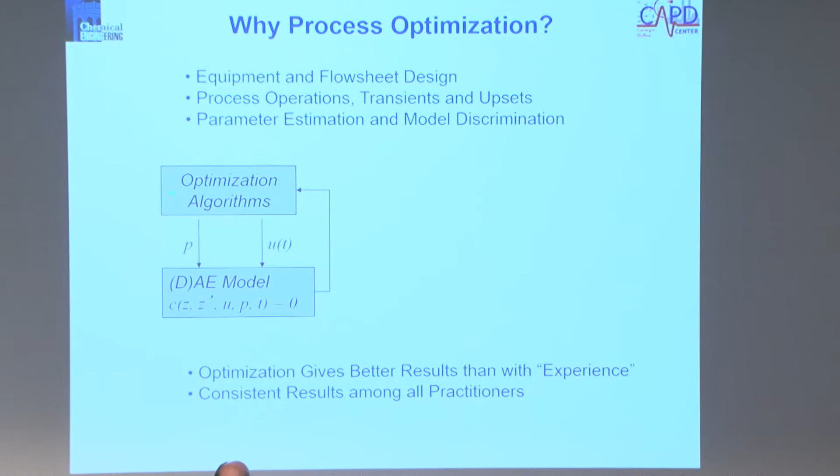So to do this, I'd like to start with a fairly basic concept: what do people think of as optimization? They think of it as glorified case studies. You build a model, and what you do is run a bunch of cases with certain inputs, maybe some trajectories. You solve that model many times, and there's usually some procedure, some guide that helps you come up with that. Then it decides for some reason that it's done, and you decide that's the best you're going to do. That mindset has been around for a long time, in commercial products as well. And it's one of those things where you wonder, can I do better?

A lot of people look at this and say, sure, I can do better. I can just use my brain and get some insight into the process and do it that way. But to be honest, it is something that engineers do, whether they realize it consciously or not.

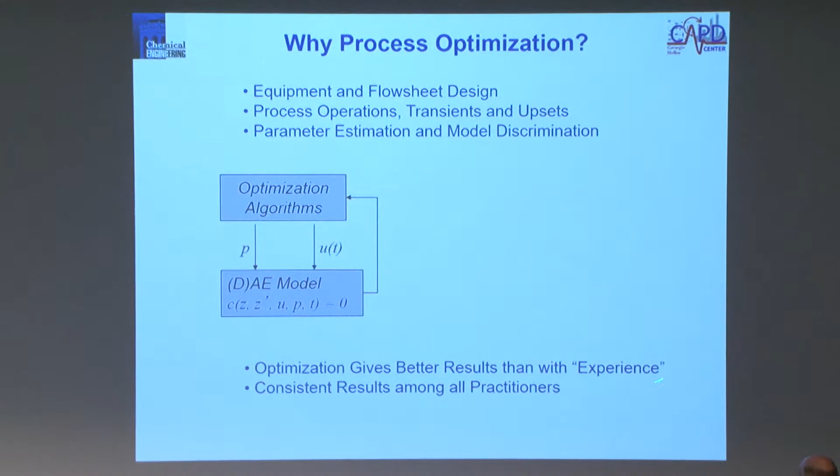What you're talking about here is equipment and flow sheet design, process operations, looking at transients and upsets, planning, scheduling, parameter estimation, model discrimination. This is one of the reasons why it's good to adopt some kind of systematic approach. It's better than just doing the experiential, intuitive thing, and it's consistent among practitioners.

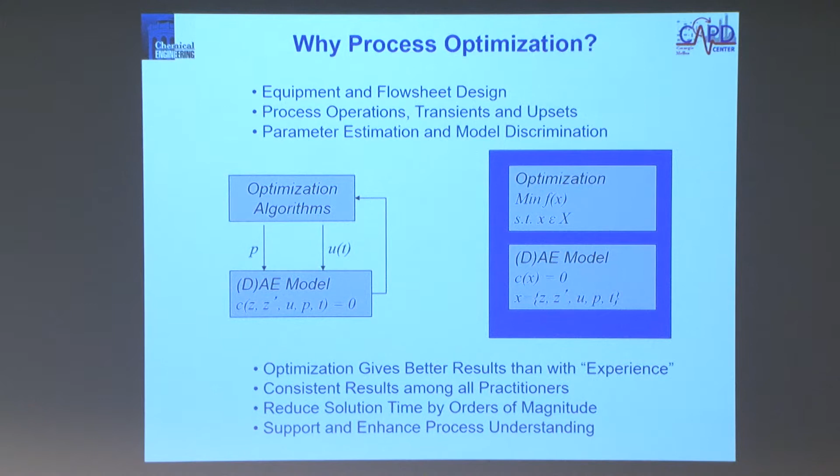But there's something more we can do, and that is to embed that optimization problem inside the solution of the model. We can do these simultaneously. We can find ways to accelerate the process and get more information out of the model, which allows us to say with more certainty what we end up with. So that's basically what has motivated me and several others in terms of thinking about process optimization.

It's actually kind of a nice way of resolving this method of multipliers, looking at a way of coming up with convexifying the Lagrange function, forming things like augmented Lagrangians, and then also being able to decompose them by going further and modifying that. A wonderful paper that was written at that time, work that George did and Art Westerberg did, and the amazing thing with Art is if he's sitting right here, still looks the same.

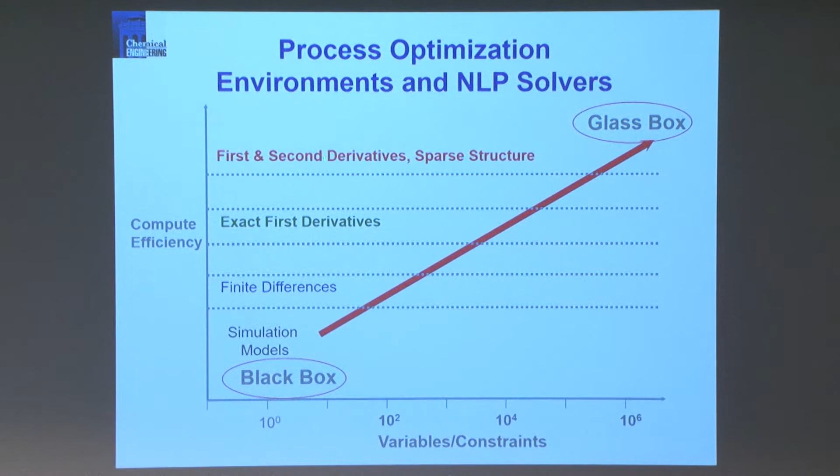There are many modeling platforms, and one I can think of from back early on is the work done at Imperial and at Carnegie Mellon with SpeedUp and with Ascend. What you have then is the opportunity to gradually open up these models and mate them with the appropriate algorithm. Starting down here, you have derivative-free optimization.

Going all the way up, you have the barrier approaches that can handle millions of variables. The number of simulation time equivalents it takes to do a moderate-sized optimization goes anywhere from several hundred, sometimes even several thousand, all the way up to one, where the model and the optimization problem are essentially doing the same amount of work, and then it solves.

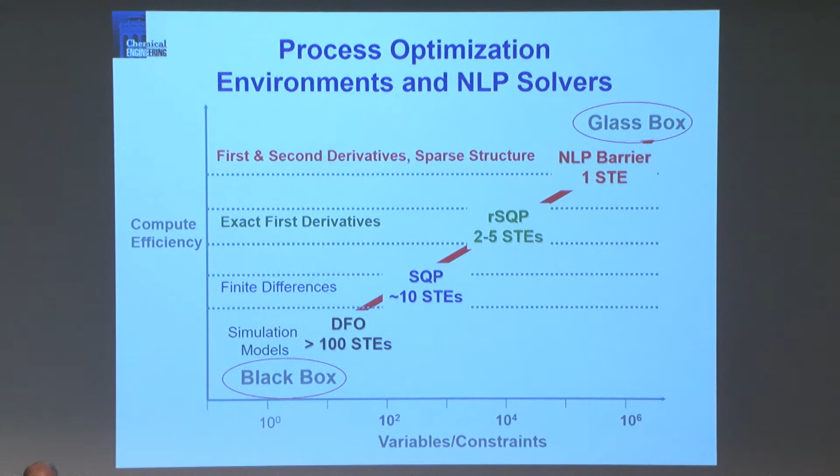So this is the kind of thing that's happened over the last few years. These are the advantages we've discussed. Now where do we go into the future? To go into the future, I'll use this phrase: equation-oriented utopia.

The equation-oriented utopia is coming. It is almost here. And depending on who you talk to, I think you'll say it has been here for a while. So what we're talking about here is glass box models, where you have exact Jacobians, exact Hessians, sparse equation structure.

We're talking about fast Newton-based solvers, the ability to do post-optimality analysis and interpretation, and then you can use that as a springboard to go to mixed integer programming, to deterministic global optimization, and then doing stochastic optimization to deal with uncertainty, and also to deal with non-smoothness — things like MPECs and MPCCs that allow you to deal with complementarity constraints. So those are the kinds of things that are coming, and they're available.

I wanted to share with you what kinds of problems you're able to solve when you do this. Here's a problem we worked on 10 years ago. This was a really neat problem, kind of an important societal problem that we worked on with Sandia National Labs.

This is basically a fault detection system. What it says is if there's a contaminant in a municipal water network, find out where it occurred, how much occurred, how much got into it, and when it occurred. And then what you have is a sensor network — the challenge is also to build that sensor network.

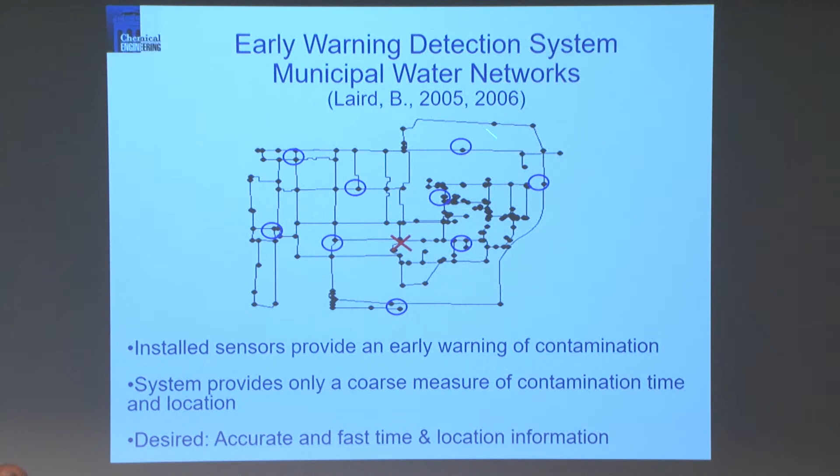But you have that sensor network, which basically says, given that, can I solve that identification problem? So it's kind of a neat problem. There's the fault, there's the sensor network, and you have all these measurements you can take, and now you take that model and solve the inverse problem.

So, good. You make a couple of assumptions. You have pumps, valves, and pipes. You have storage tanks and junctions. And then you think about what you can make as assumptions for the model in terms of mixing at nodes, plug flow in the pipes, etc.

Reasonable things. And here's an interesting one: hydraulics and water quality are decoupled. In other words, if you have a contaminant in there, your pipe flow is independent of that.

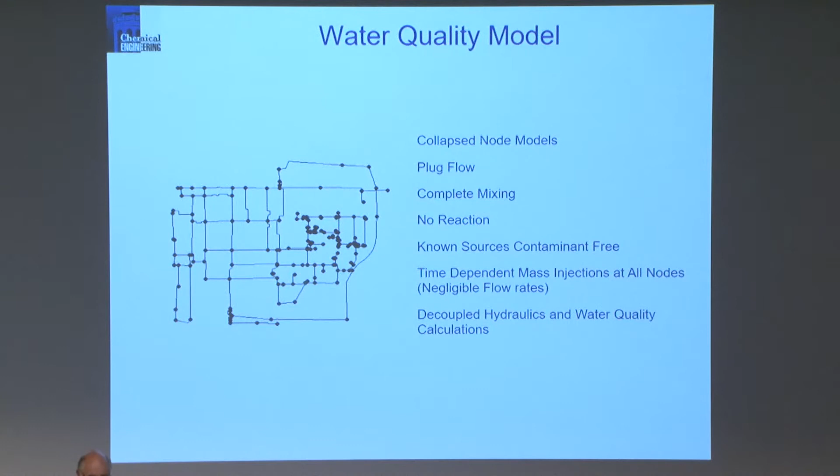Okay, you calculate that first and then figure out how the contaminant moves along. So here's the problem, okay?

So this was kind of an interesting problem that we looked at. Bear in mind, we know the flows, or at least we can get an idea of the flows before we solve this problem. Now let's take a closer look at this.

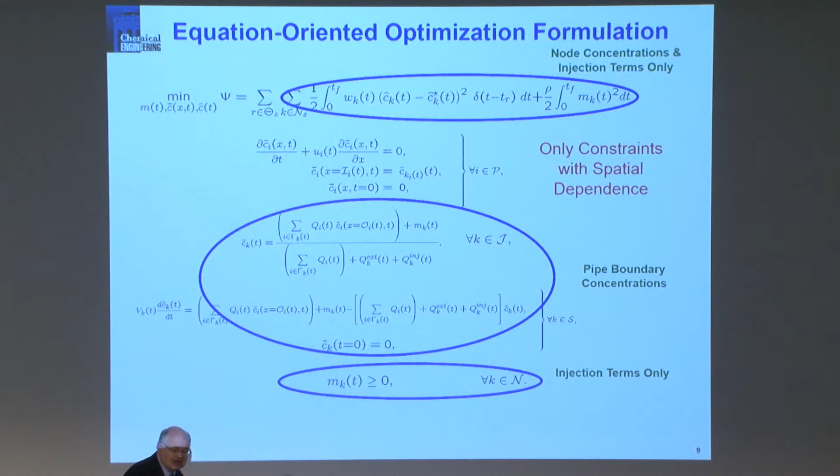How would you like to approach this problem? Do you discretize in space and time, or do you move with the particles? On the left-hand side, you can discretize in space and time. Back when we looked at this problem, we said, for a city where you have maybe 500 or 1,000 or several thousands of nodes, discretizing every pipe segment might get a little bit large.

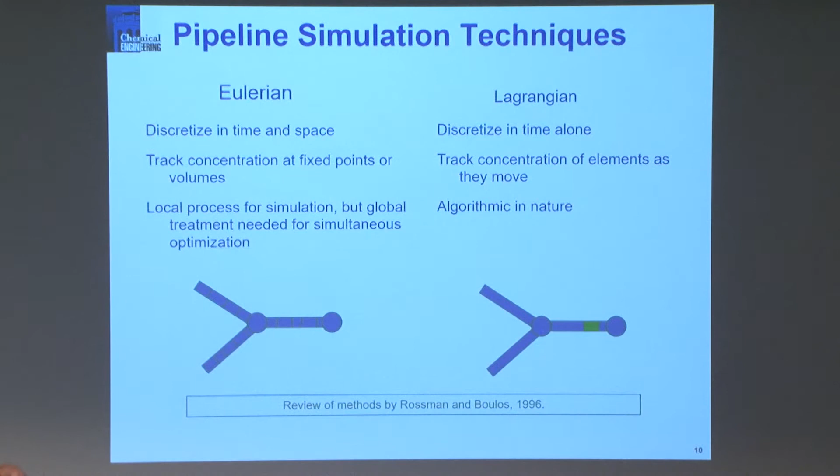But what you can do, because you know the water flows, is you can do this Lagrangian model. Basically track each packet of fluid. So if you track each packet of fluid, what you can do is say, okay...

What you know is the contaminant at this time, at node A, is going to be the same as the contaminant at a later time. And so what you do is basically build these variable time delay models, put them together, and then every node and every concentration at every discretized point in time is going to be related back to something at another point in time. And you build this variable time delay model, and it gets really large, okay?

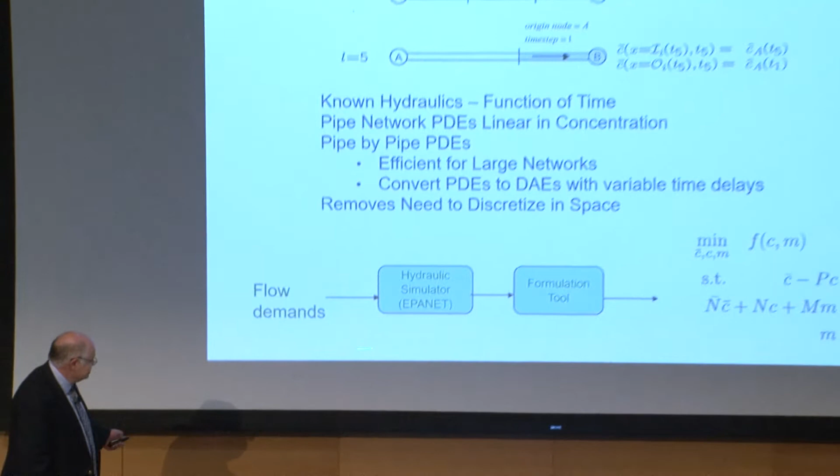So there's your simulator that basically gives you the flows, tells you how to get the time delays. You build in this discretized model where you have the elements of the inlet and outlet flows, and there's the time delay model. You relate that back to everything that goes through a node plus the contaminant, and then you have your objective function. So this is the discretized problem, and it's a nice problem, but it's huge, okay?

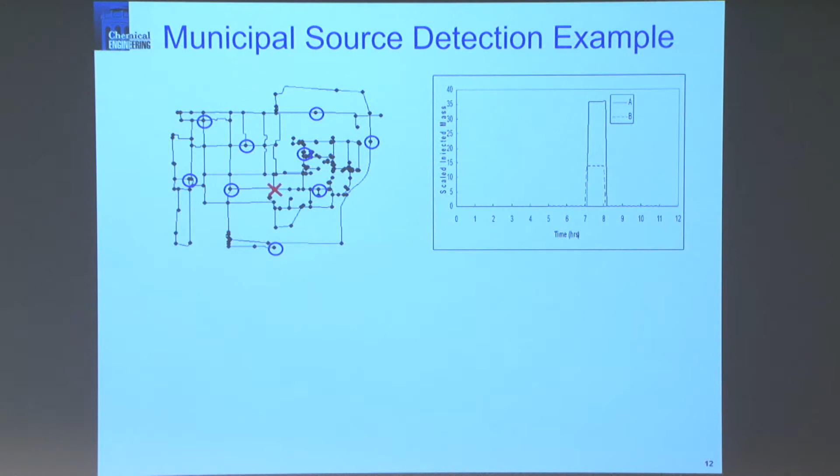So let's see what happens when you solve it. So there's the problem, and these are some simulations that Carl Laird put together. What you have is over 1,000 numerical tests on a municipal water network. It's about 500 nodes - not every tap, but it's a pretty good sized problem.

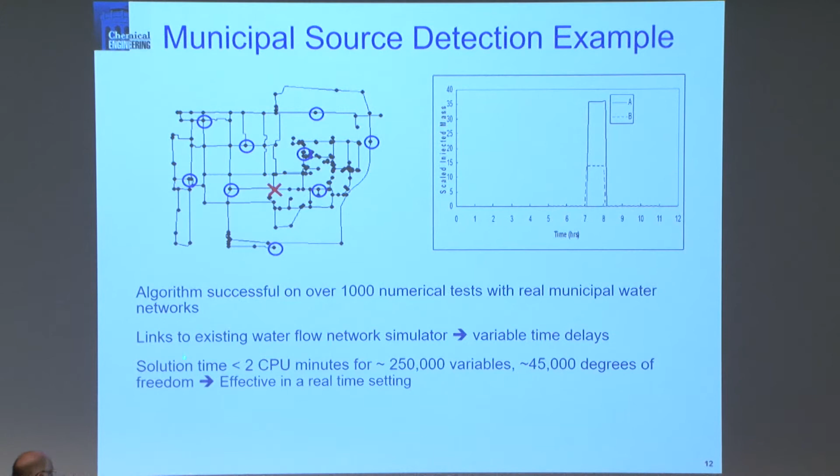You can link that to the water flow network simulator. It's got about 250,000 variables, 45,000 degrees of freedom, solves in 2 minutes. That's what the optimizers are able to do these days, okay?

And this is the result. Those thousands of tests are basically what happens if you increase the placement of sensors and where do you put them. And then during the injection, you figure out what can you estimate, and then what you can't estimate. And we do this brute force - we just solve the problem and see what happens.

And you can see from this color code, there's a little bit of smearing. But in fact, you can add integer variables - there aren't that many - and you can actually get unique solutions by solving something called an MIQP. And that will allow you to get unique solutions that pinpoint where the contaminants are. So in this case, there were 4 cases where we could have a contaminant, lots of nodes that could be added, and that's the idea.

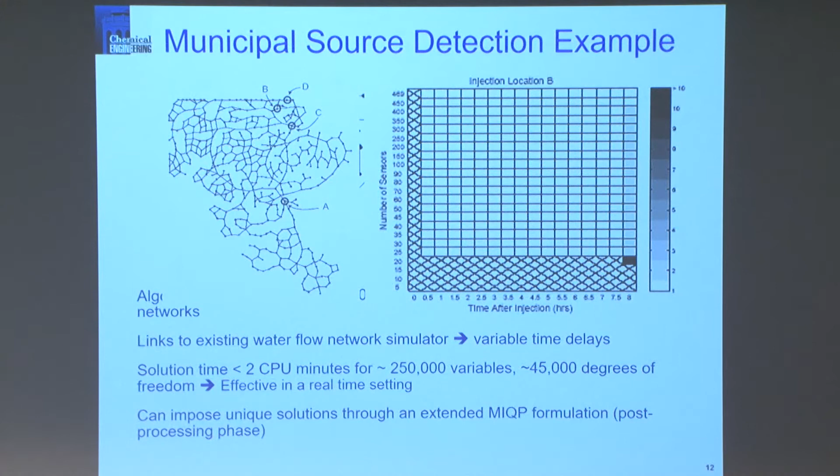And so what is allowed is that with that CPU time, this is effective in a real-time setting. Okay, now, let's ask a question.

Suppose I have some uncertainty in my flow simulator. Suppose it's actually uncertain for various reasons - there are disturbances in the inputs. And so as a result of that, what you'd like to do is sample those and then come up with a way that will do a robust fit or robust determination in order for you to come up with the best solution. How can you do that?

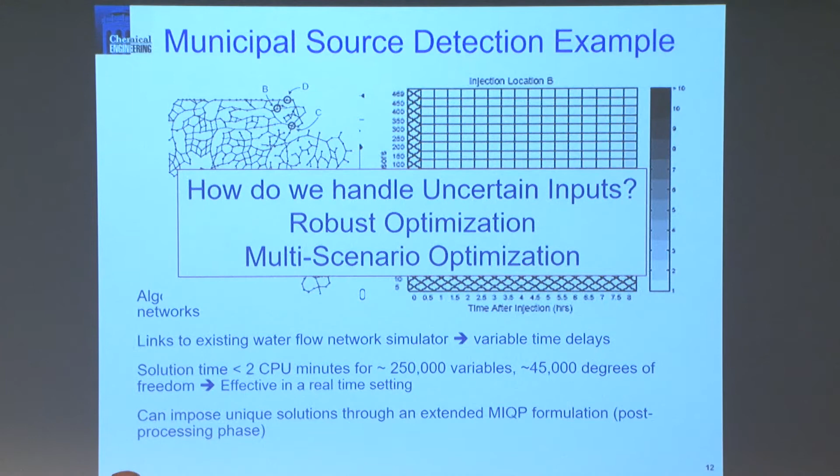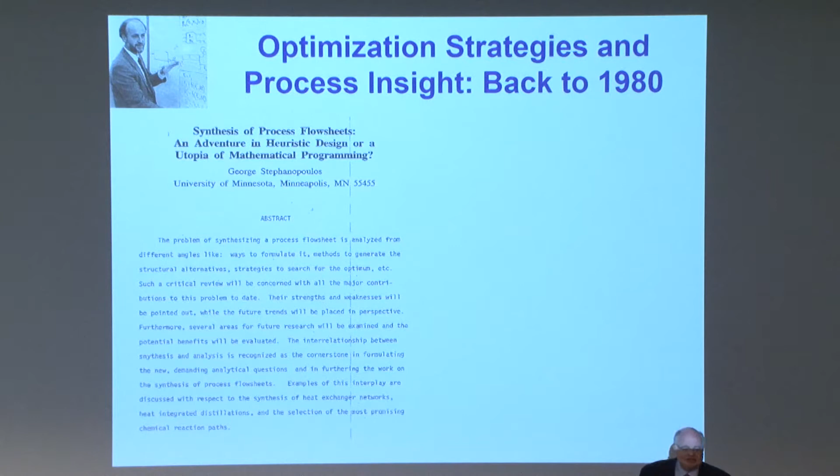But the idea here was to look at it from both sides, and it's a beautiful review of the state-of-the-art of process synthesis. George talked about progress on the optimization front and progress on the heuristic front. Basically, the breakthrough there was pinch technology, but it wasn't the only thing—it was dealing with heat exchangers, distillation sequences, reaction paths, reactor networks. Basically a very thorough and very nice review.

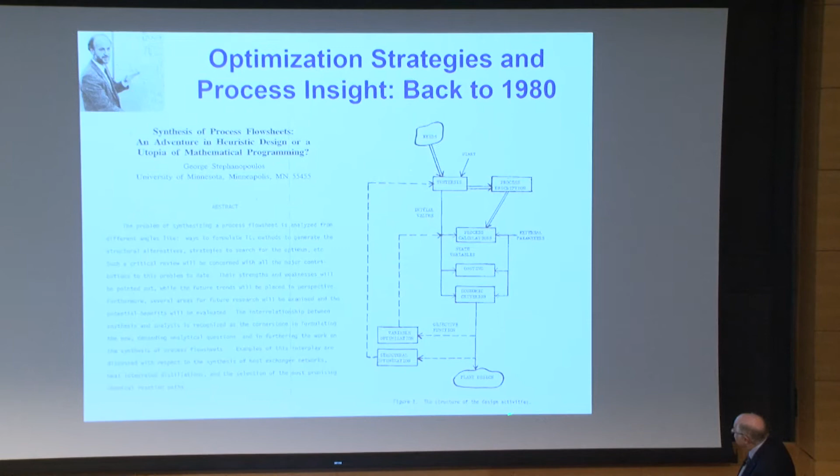And then the question: where do we go from here? This was kind of the framework he put together, saying this is basically the synthesis problem, okay? So what we want is to get a lot of insight, put a lot of calculations to support that insight, and basically drive a solution. And then, of course, there is still the importance of doing some optimization.

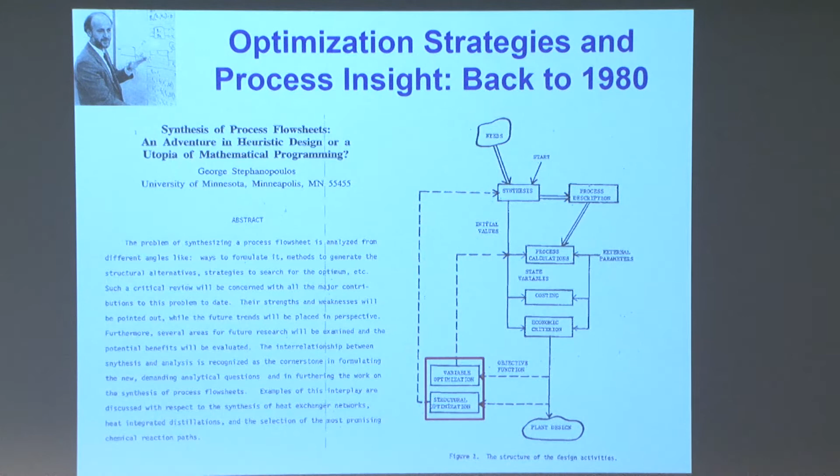And the metaphor he used that was very important was to think of this as a chess game, where you have a start game where the moves and standard features are pretty well known. You have an end game where the combinatorics are all gone, with pretty straightforward ways of finishing and winning. And then there's the mid-game, where you're faced with a very difficult structure, and if you don't do it right and take advantage of the combinatorics, that usually decides the game, okay?

And that's where I think I realized the importance of these boxes here. But what's more important is the importance of process insight—figuring out what the model should do and how the optimization should be guided by process insight. And for that, I wanted to show you an interesting story. What we have here is bunches of models, okay?

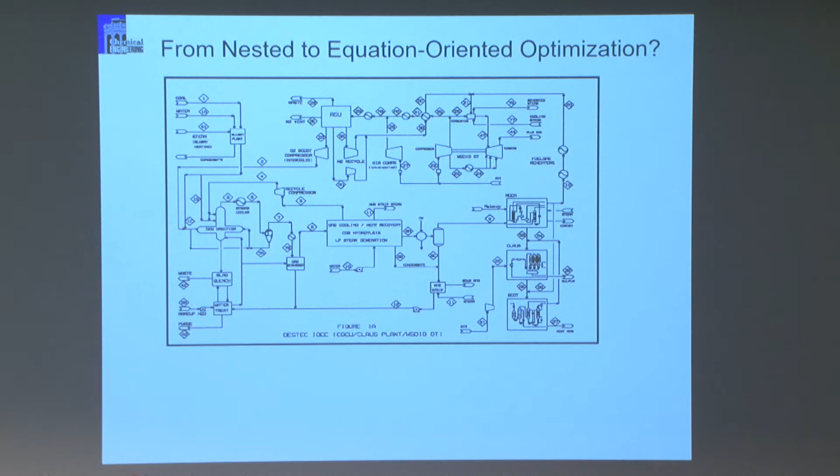And they're not always equation-oriented models, okay? They are actually quite different beasts. They're heterogeneous. So here we have a flow sheet, and you basically come up with the model that you have for these things. And then what you want to do is talk about different conservation laws.

Usually the linear ones are nice to have. The physical properties can get a bit tough. The separation models, you have lots of levels of modeling, and then the reaction elements, you can take it all the way from stoichiometric models to CFD and multi-phase.

This is very similar to what Costas talked about this morning, and the importance of dealing with these multiple models as a multi-phase and a multi-scale problem.

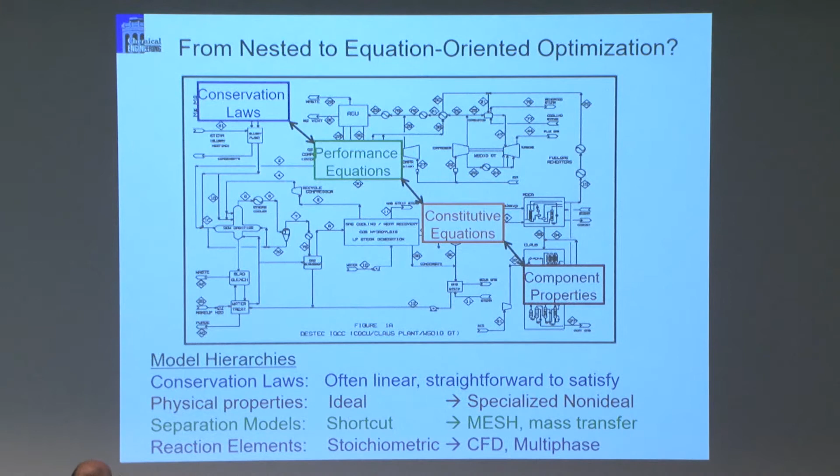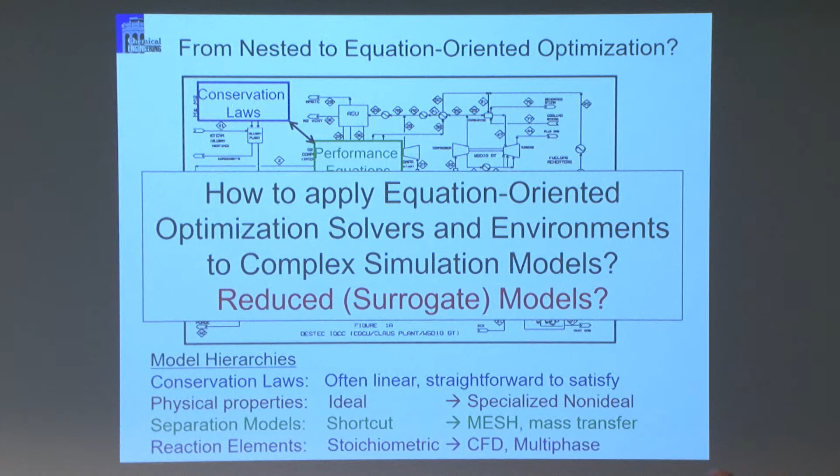But now let's take a look at this and ask the question: if we have these really good optimization strategies, can we apply them to complex simulation models? And the thing we want to do is say, well, yes, people build surrogate models all the time that are also glass box models. Question is, are they any good? Okay? So this is really the issue.

There are different kinds of surrogate-based models. We saw this morning about the idea of data-driven models that replace the physics, okay? And basically, if you have enough data, you build these models and use them to make decisions. There are spectral model reductions, there are physics-based model reductions, and the question is, are they usable in an optimization context? Okay, well, this is actually a good question, and there is an answer to this.

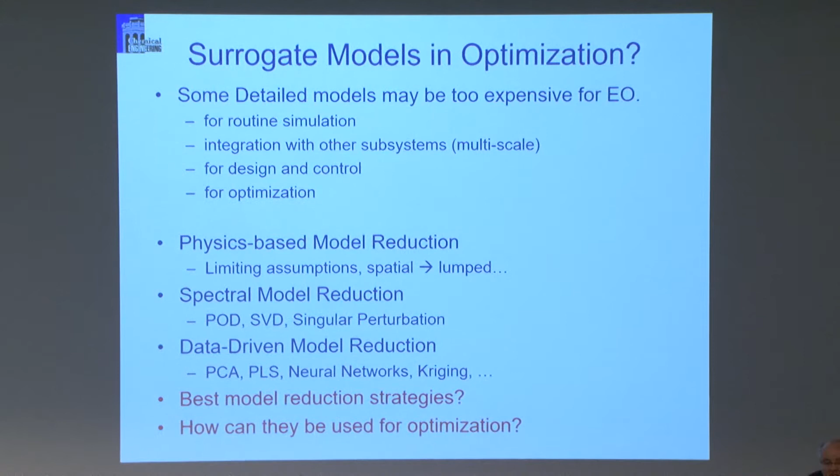The answer is they are usable as long as they are consistent and stable. Familiar concepts from controls theory and from approximation theory. You want the reduced model to recognize the optimal point, let's say a KKT point with second order conditions.

You want also to make sure that when you do an optimization with a reduced model, you're making improvement during that sequence of steps toward the optimum of the original model, which I call the ODM, okay? So if you have these two properties, you can prove that you're going to converge to the solution of the original model, okay? That's nice.

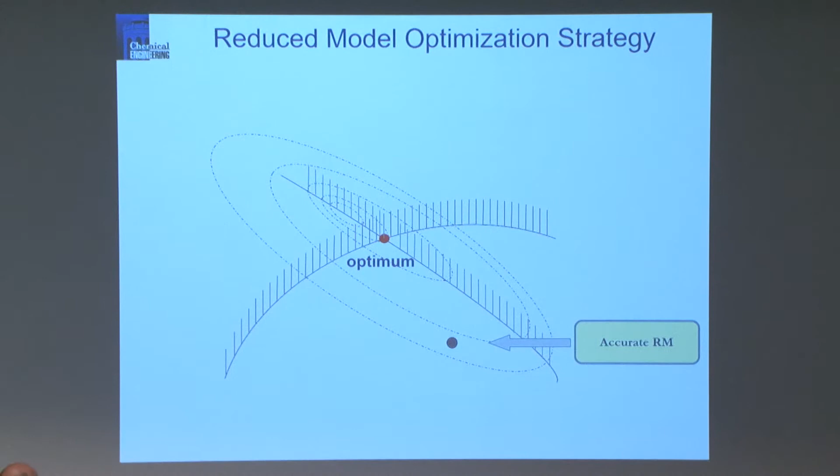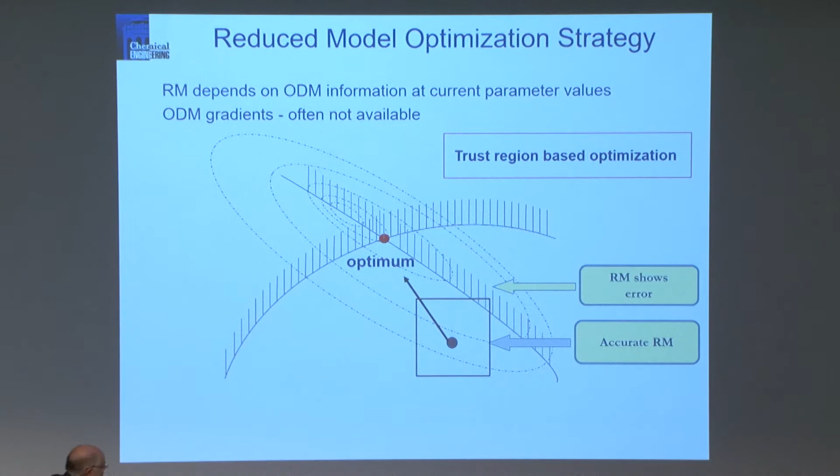So let's take a look, okay? The way you can do that is basically by building a reduced model at a point and then taking a step. And if that step shows that your model error is too big, well, then you have to cut back on that step, put it in a trust region. Then take the step and guide that trust region very carefully until you converge.

Now, why is that important? Let's take a look. This is an example that's very old, and I've talked about it before, but it was one thing that got me very excited when I interviewed at CMU, okay? Because this had to do with the inside-out algorithm in Aspen.

And Art kind of teased me a little bit and said, I have a counterexample. Okay, and then I talked to Ignacio, and Ignacio said, I have a counterexample. And then I thought about it, and I said, I have a counterexample. Okay, so the three of us had counterexamples, and we wrote a paper.

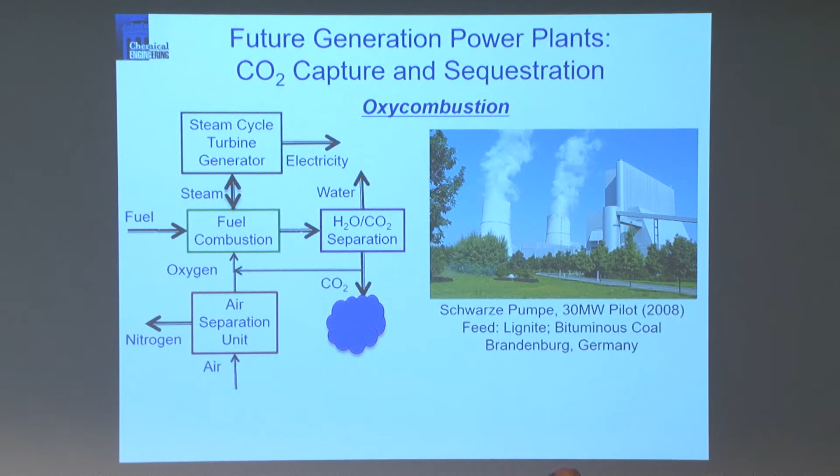You can make the decision of either doing this with air or with an ASU over here, and then you have to remove the carbon dioxide, and then bring it up to 150 atmospheres for sequestration.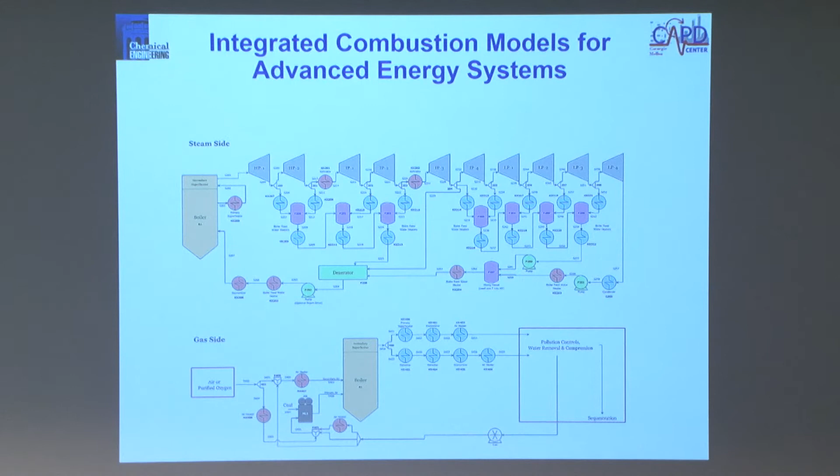So there's the problem. How do we optimize this, given that you're never going to be able to put that boiler model as an equation-oriented model? It's not glass box. So we put together a 3D model—it's a 3D PDE model. It's not quite the full CFD with multi-phases and random walk models for particles, but it's pretty good, and it's been validated pretty well.

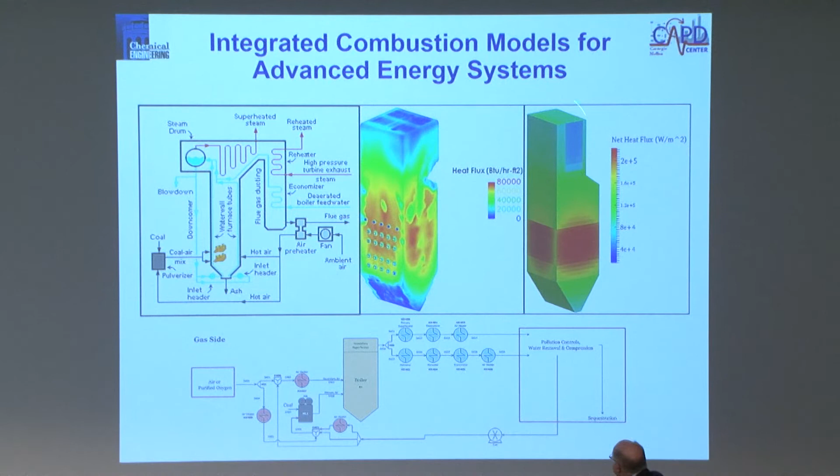So that's our truth model, and we need to get surrogate models from that. We even did some surrogates on the steam thermodynamics, put it all together, added a few things, and set up an optimization. It took a while, about 700 to 800 calls to the CFD model, because our reduced model wasn't very good.

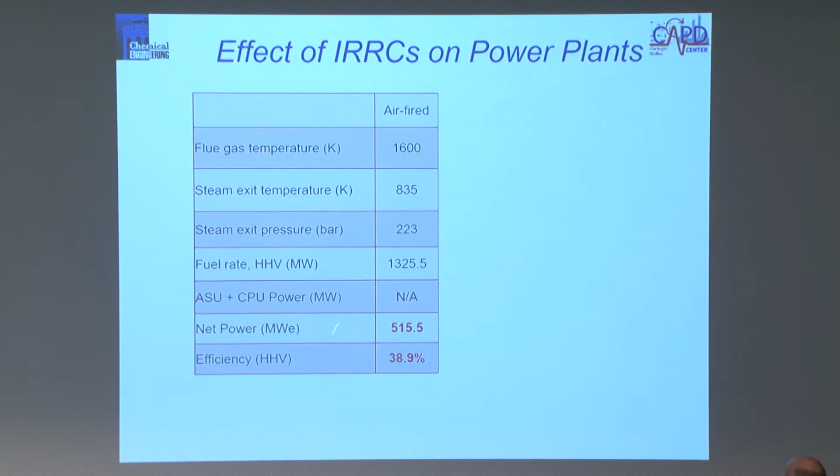That was the proof of concept. We wanted just a very simple reduced model—you go back and correct it, and after 80 iterations, it actually converges, and you can prove that it converges. So we get an efficiency of about almost 40%.

If you do carbon capture and pay to combust in oxygen instead of air, you pay the price—you have to satisfy this much power, so you lose a bit of your net power, and your efficiency goes down. You pay this penalty, but it's actually quite good because the typical penalty is more like 10%.

If you do some additional heat integration using Rankine recuperative cycles, you can take more advantage of that ASU and recover a bit more efficiency, and the penalty goes down to only 4.4%. Each of these optimizations was done with that fully 3D model embedded within a glass box model in the trust region framework. That was basically what we had to do.

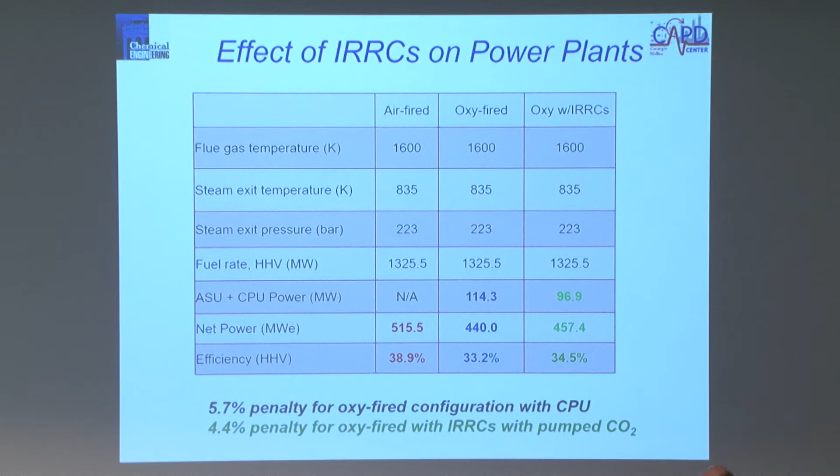This is how we would handle tough models that might resist being made glass box. The enabling tools: we want to leverage the potential of glass box optimization, parallel decompositions, tailored reduced models. We have globally convergent algorithms to put them together, and tailored reduced modeling platforms. Hopefully this gives us a way of dealing with multiple scales.

Where is it going to be used? I can see lots of places. First, heterogeneous models combining CFD and process flow sheets, maybe molecular dynamics. You integrate process design, control, and scheduling, and integrate all types of time and length scales. This has been George's vision, this idea of multi-scale—everything integrated, important not just to look at the plant, but everything from the enterprise, the supply chain, all the way down to the atomistic structure.

What's interesting is what links them together, what is the glue, is the reduced model. If it's a good reduced model, you can apply fast optimization tools at the right levels, link them together, and now you have a strategy for an integrated optimization. That, I think, is the future.

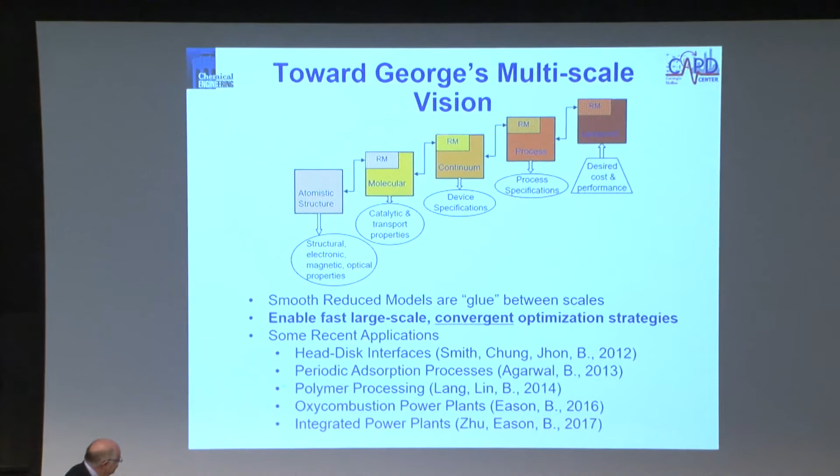So it enables fast, large-scale convergence strategies. We've had some success with a number of very diverse applications, from polymer processing to magnetic recording materials to adsorption to power plants. I think this is the kind of thing we can start to expand. So I'd like to say that's where we're going.

So let me conclude and say, George, deepest appreciation and gratitude for all of the wealth of your contributions and your advice. Happy birthday. Best wishes for many more.

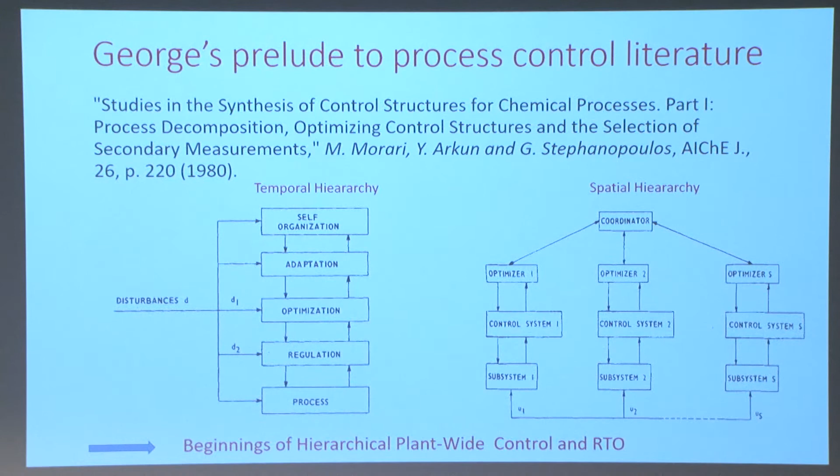Now, in the rest of my talk, I will try to show how these concepts—complexity, temporal and spatial hierarchies—appear in biological systems.

In particular, in recent years, I have been interested in signal transduction pathways within cellular networks. These signaling pathways consist of signaling proteins that transmit information contained in a stimulus outside the cell, all the way to the cell and to the nucleus, where most of the important cellular functions are executed. So it's basically an information flow diagram. And I'm going to...

Pick a case study, a much studied system, the MAPK pathway. This pathway is important; there are lots of results in the literature. It is important because it plays a central role in controlling cellular growth, proliferation, differentiation, apoptosis, and so forth. For this reason, it has been a therapeutic target for treatment of cancer.

So the way the signaling path works: it is initiated by binding of an external stimulus, in this case epidermal growth factor. It binds to its receptor, and this is followed by a series of phosphorylation reactions involving different signaling proteins. Through these reactions, ERK, an important protein, gets activated. It gets translocated to the nucleus, where it promotes the transcription of genes needed for different cellular functions.

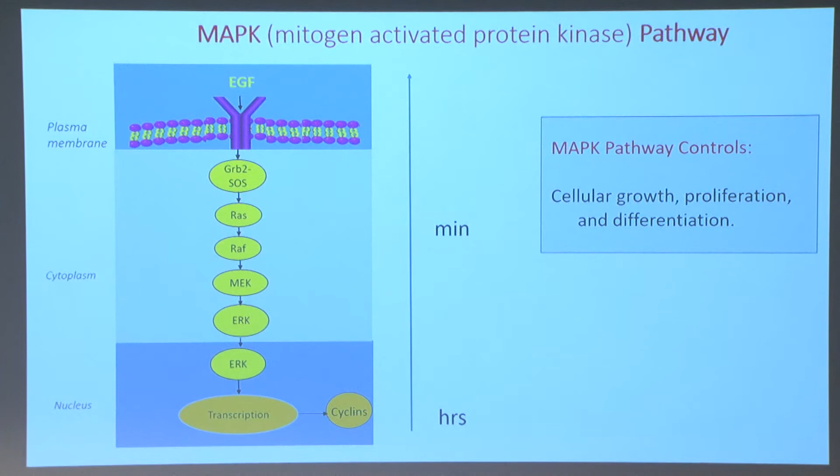Now, it plays a central role in cell cycle control. So here I am going to try to conceptualize cell cycle control and ERK signaling as a hierarchical control problem.

At the top of the hierarchy, there is a supervisory controller. This is the master controller that tries to schedule the different events or phases of the cell cycle, which consist of growth, DNA synthesis, and mitosis. So it's basically an event scheduler operating at the high level.

Each of these phases requires a different type of cyclin, a protein, with a different type of time trajectory. So you may consider these as set points for the system.

So the supervisory controller, in order to start the cycle and control its progression through different phases, requests or orders the lower layer controller—the MAPK pathway—to produce these cyclins. At the lower level of the hierarchy, we have the MAPK control system with its regulatory feedback loops. Basically, the signaling pathway generates different activity of ERK in the cytoplasm and the nucleus to generate the desired cyclin. So it is exactly like a hierarchical control that operates for different process control systems.

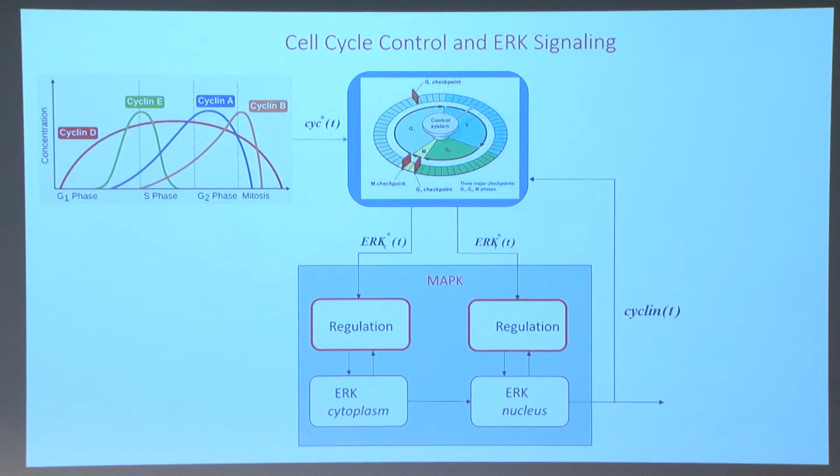Now let us see how the regulatory feedback structures for signaling pathways are synthesized and how it applies to the MAPK pathway. The problem is quite similar to process control structure synthesis, and it goes through the same type of questions that were posed in that 1980 paper.

So we have the cellular signaling pathway here, and then the controller, the feedback regulator. The components of the feedback architecture consist of measurements—the sensor molecules that will provide the measurements to the controller—so those molecules have to be selected. And then we need the manipulated variables, or actuators, which will act on the signaling pathway.

The controller actually consists of another signaling pathway or reaction network, which is basically the map, the relationship between the measurements and the actuators. So the synthesis problem is to select the sensor molecules, actuator species, and the reaction network that models the relationship between these two sets.

Now let us see how nature has actually developed this control system for the MAPK pathway. The feedback control systems for signaling pathways consist of a set of positive and negative feedback loops, and that unique combination determines everything.

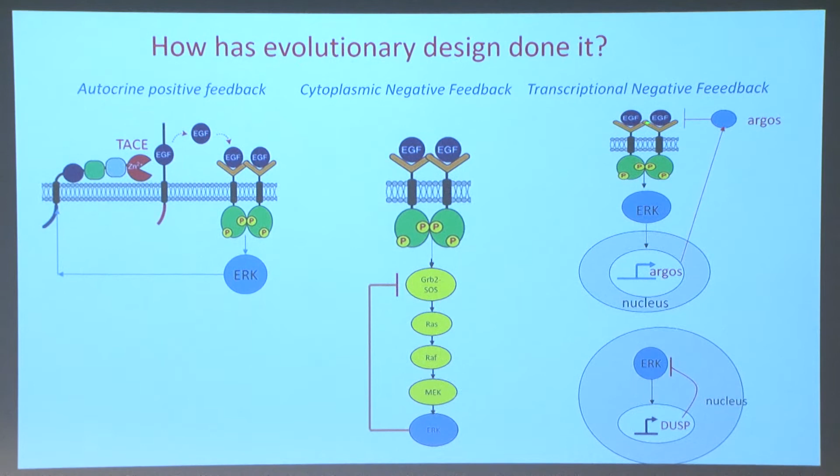And the others are transcriptional loops. Basically, ERK produces its own regulator, in this case the inhibitors - Argos, and these dual specificity phosphatases. These proteins are produced by ERK, but in turn inhibit ERK in different ways. These effects are interestingly hierarchically and spatially distributed. The phosphatase inhibits ERK in the nucleus, while Argos, produced in the nucleus, goes back and inhibits ERK activity outside by inhibiting the binding of EGF with the receptor.

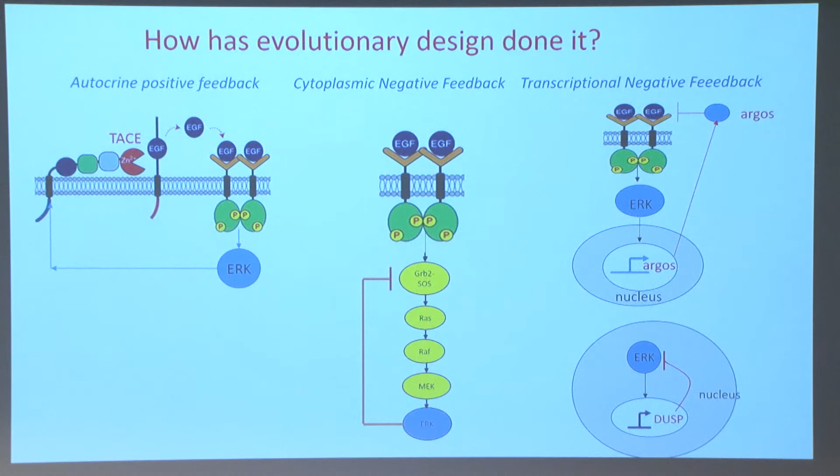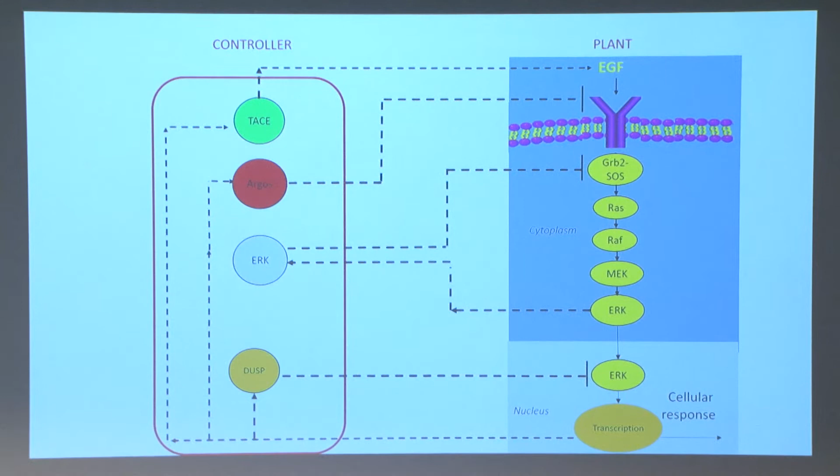So here there is enough flexibility to sustain the signal, to deactivate it inside and also outside. It's a pretty rich framework. If you look at the whole system as a closed loop system, here we have the plant, the so-called open loop system, and here we have the control system. The controllers, basically actuators - proteins or genes that operate like actuators - are hierarchically organized, and they affect different parts of the process. Some operate in the nucleus, some in the cytoplasm, some outside.

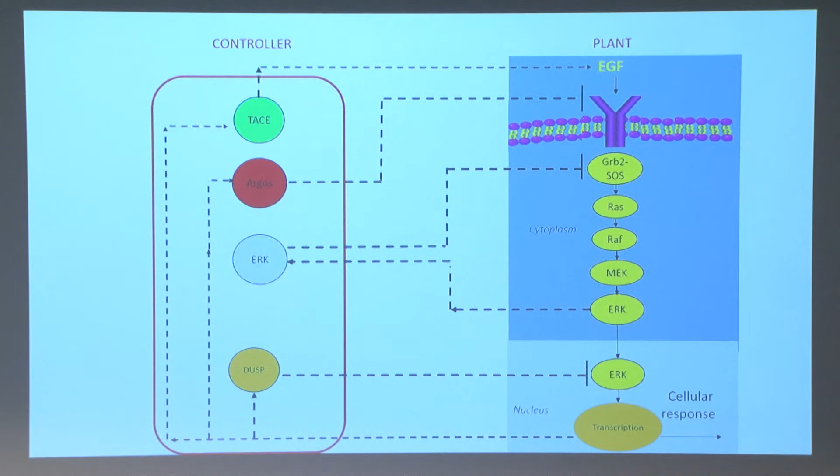Now let's look at the closed loop dynamics of this pathway with these controllers. First of all, probably the most important characteristic of signaling pathways is bistability. Most proteins and genes switch from one stable state to another to perform their functions. Bistability is basically, if you look at the input-output map, an unstable branch separating two stable branches. Bistable systems operate like A-to-D converters: you receive a continuous signal from the stimulus, and bistability provides an on-off switch, or active-inactive switch, for a protein.

These exist in many signaling pathways, and they are robust because they hold for a wide range of parameter values, controller gains, and so forth. So most systems have this robust property and switching behavior. This happens in many networks. If we look at the MAPK pathway, we see bistability for this system as well.

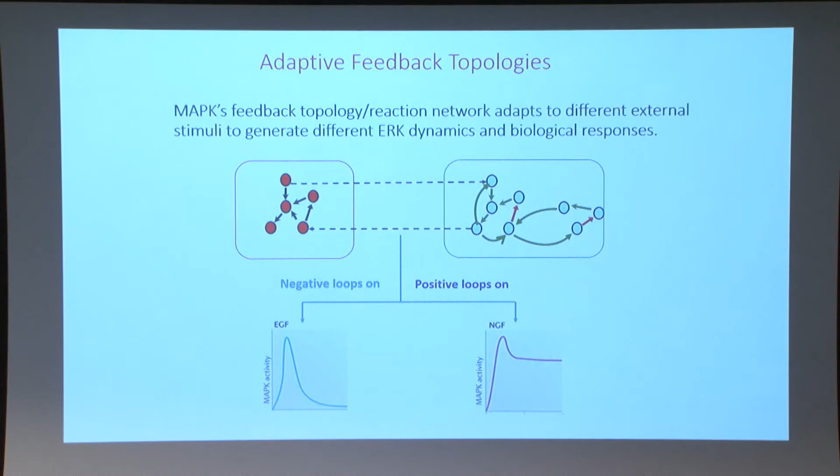So if you look at the next slide, here we emphasize the importance of adaptive systems. The loops are smart because they are adaptive. They can reconfigure their structures depending on the stimulus. So MAPK's topology, which is actually the reaction network,

changes or adapts to different external stimulus to generate different dynamics and biological responses. For quite some time it has been well known that when the external stimulus is EGF, epidermal growth factor, the response is transient. That's basically ERK activity, which is a transient response, and that leads to proliferation of the cell. But because the same cell receives different types of stimulus, if the stimulus is nerve growth factor, a different type of stimulus, then the response of the same pathway is sustained, which leads to differentiation.

So the question is, how does this happen? This has been verified experimentally. It happens because the loops reconfigure themselves. This reaction network, when it receives a different stimulus, rearranges itself and provides a different response. So in this case, for the response to be transient, the negative loops should be on and the positive loops should be off, otherwise the signal would be sustained. In the other case, when the response is sustained, the positive loop is on and the negative loops are off. So basically, the cell recognizes the type of stimulus, rearranges the loops, and provides the right response. This is also mentioned in the literature as rewiring the loops for specificity, because the system provides different specific responses to different stimulus.

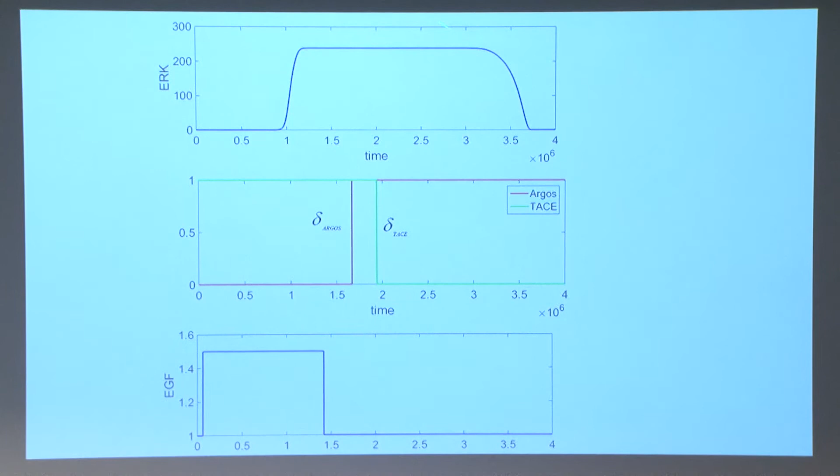So it sustains itself because the positive loop is there, because you have the autocrine positive feedback. So even when this comes down, autocrine feedback is still on, and then this is on as well. But after a while, you want the ERK to come back to its quiescent state, which implies the positive feedback has to switch off, and the negative feedback, which is inhibitory, has to switch on. So that's actually what's happening. Stimulus returns, the positive feedback comes down because you don't want to sustain the signal anymore, and the negative, inhibitory feedback brings it down. So you can basically orchestrate the actions of these control loops and the external stimulus to obtain any dynamics you want from ERK.

So some challenges for the future. I guess the first question is how complex should the models become? We have heard this in different contexts, right? Modeling, optimization, and so forth. So these models, how complex should they be? Now, there is a lot in the literature using Boolean models, zero ones, versus mechanistic mass action kinetic type of models. And then one can possibly combine these.

Some parts of the pathway which switch can be just Boolean because you don't need much detail, it's just on and off. But the other part which doesn't switch may require more detailed mass kinetic models. A new paradigm, will it emerge? What kind of a paradigm that will be? That's a question I cannot predict, but I'm sure there will be some combinations which require the least amount of information and complexity without compromising the essential features of the pathway's functioning.

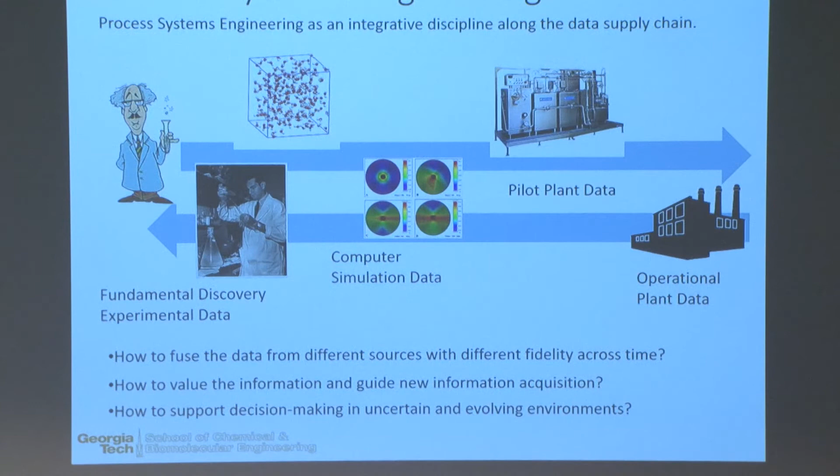So what I wanted to talk to you today about was Bayesian process engineering, which is my vision for what process systems engineering needs to become over the next 20 to 30 years. Basically, I think we need to be thinking carefully about this idea that we have a whole variety of information sitting at multiple different places, at multiple different scales, being generated in multiple different ways. All of that information somehow has to be integrated together to have effective chemical engineering systems. So I'm envisioning process systems engineering as an integrative discipline along this data supply chain.

We could be generating petabytes of data at the operating plant level, but at the same time, our experimental colleagues may be generating information at an extremely slow rate, for example, by taking multi-component isotherms at cryogenic conditions. If you've ever spoken to your experimental colleagues about taking multi-component isotherms at cryogenic conditions, you'll know this is not exactly the stuff that proceeds at a very high rate.

Similarly, we may be performing molecular simulations which themselves may take several days to run before they finish, or we could be doing complex CFD calculations. The question is how to integrate that information together to come up with a more effective chemical processing industry.

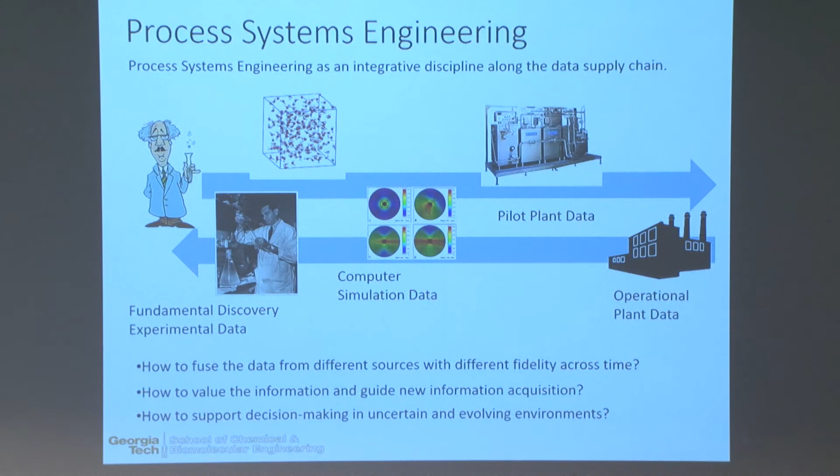So what I want to do is discuss three problems: how to fuse data from different sources with different fidelity across time—we're generating experimental results, how do we update models to include that new information? How do we value the information and guide new information acquisition, essentially experimental design? And how to support decision-making in uncertain and evolving environments? Those are the three questions I'd like to take on.

So I'm going to take as my central goal the idea of inference, or essentially taking observational data, model and model parameters, and our background and a priori knowledge, to make inferences. For example: today is the 1st of June. Today is my wedding anniversary. Therefore, it is George's birthday. Now, my wife always agrees with me that that is the order in which the inference ought to go. And in fact, she's correct.

So in deterministic inference, what we're doing is seeking single values of the model parameters to explain the data. We use regularization to enforce smoothness conditions around the solution and handle outliers, i.e. closeness to an a priori model. So we may define a misfit function where essentially we minimize some distance measure, whatever that distance measure may be, not only between the observations and what our model is saying, but also between what our model is and what our a priori beliefs are around what that model needs to be.

In probabilistic inference, what we're doing is inferring the probability distribution of a random variable rather than inferring a single value. What we're looking for is the posterior, i.e. the distribution of the variable after we have experienced data. So we're given the data and background information, and it quantifies the chance that a given model is the true one. So it moves away from the idea that there is a single model and towards the idea that we actually have a distribution over our models.

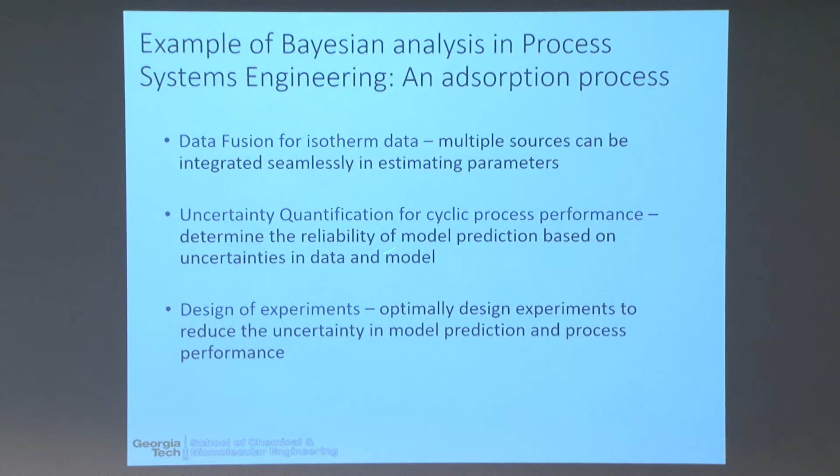Here's an example of doing Bayesian engineering, and I'm going to do this in the case of an adsorption modeling process. I'm going to show data fusion for isotherm data to indicate how we can take experimental data and computationally generated data and try to integrate those together to give us a more complete picture of the isotherm parameters. Uncertainty quantification for cyclic process performance to determine the reliability of model predictions. And then lastly, to try to optimally design a new isotherm experiment to attempt to reduce the uncertainty in the amount of CO2 we can adsorb using our adsorption process.

In this case, I'm going to take adsorption isotherm data from a particular MOF adsorbent, which is a large cage adsorbent. This is information collected on CO2 from the NIST database, from 9 different experimental groups.

So here's the point. What we have is experimental data where essentially our uncertainty around this data is itself unknown. It's coming from different experimental groups with different equipment who may have different procedures. And it's clear that we can't just take their single values. We're going to have to try to understand how uncertain that data is and try to integrate it together.

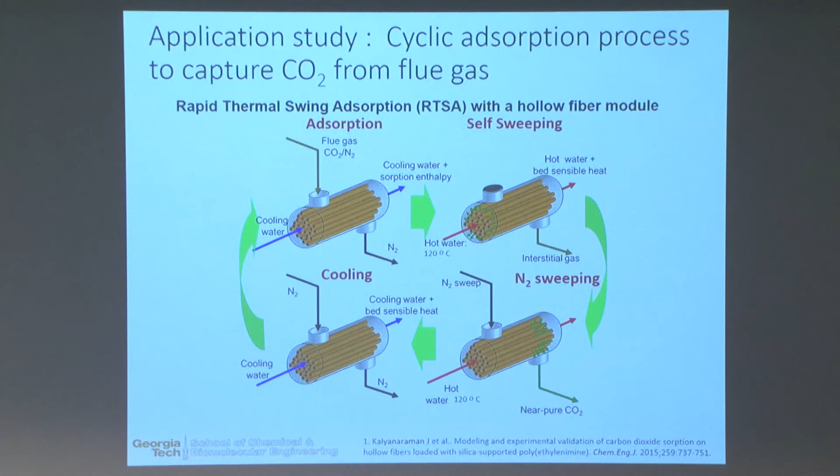So in this case, there are totally 10 unknown model parameters. We're going to comprise of 8 coupled PDEs. It's not that large - it takes about 5 minutes to simulate the adsorption step and about 40 to 50 minutes to reach cyclic steady state.

Now here again, what I'm going to say is we're not necessarily using the most advanced techniques in this area. If we were, we could reduce the time it takes to simulate this process, and by so doing, increase the speed at which we're able to make these inferences. So relying on advances in modeling is extremely important to carry out these computations in the future. This doesn't ignore what we've done in the past - it really builds on it, to perform inferences much faster if we have better modeling at the level of the process itself.

What we have is experimental data on the breakthrough curves, and these breakthrough curves are measured for 10 and 17-inch long modules at particular temperatures. So we have 2 different module lengths, and 3 or 4 different temperatures at which we're able to get this breakthrough curve.

And then we have some uncertainty around the actual experimental points themselves. What we want to be able to do is integrate this information to understand what the probability distributions are over these 10 unknown model parameters. That's the goal that we have - to take this data and use it to do this.

And again, these are experiments that are not easy to perform. These are modules that are not easy to build. So you're trying to squeeze as much information out as you can from these experiments in order that you can scale these modules up when you go to the next level.

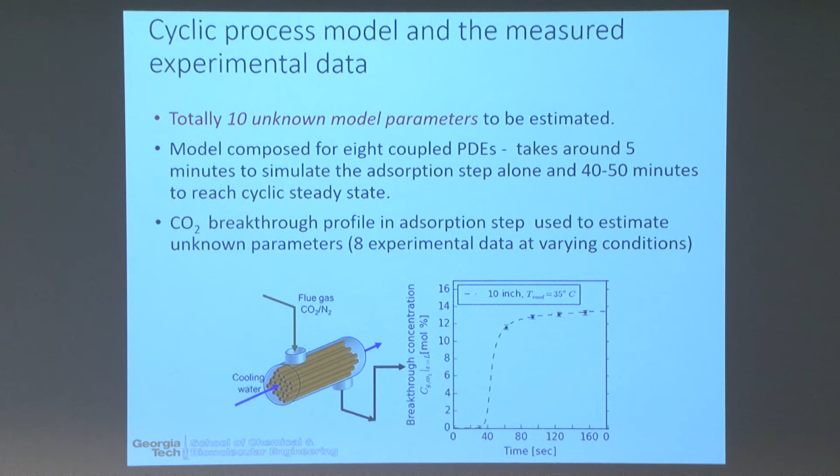So this is essentially just describing how that's done. We have a measurement with some sort of noise model. We have a number of experiments, and essentially we propagate that information through the model. For every sample value of our parameters, we do full forward simulation for each experiment to calculate the likelihood.

Now, each one of these full forward simulations can be done essentially in parallel in some way, because we can effectively take our distribution, split it up, run particles that represent that probability distribution, run them forward, reinitialize, and then run forward, and creep up on the posterior distribution of the parameters given the data.

So that's what I'm going to show. I'm using sequential Monte Carlo simulation, and essentially what happens here is that the particles are initiated across the probability distribution. Those particles evolve with time over short hops using Markov chain Monte Carlo simulation, and the probability distribution as a whole is then evolving as you do this simulation.

And what this enables us to do is parallelize the computation so that we can essentially do each one of these changes in parallel and end up with the final probability distribution, where we're creeping up on that distribution by varying the influence of the posterior - from essentially having a 0 coefficient on this posterior to having a coefficient of 1. So essentially it's a relaxation that enables us to creep up on the posterior distribution simulation.

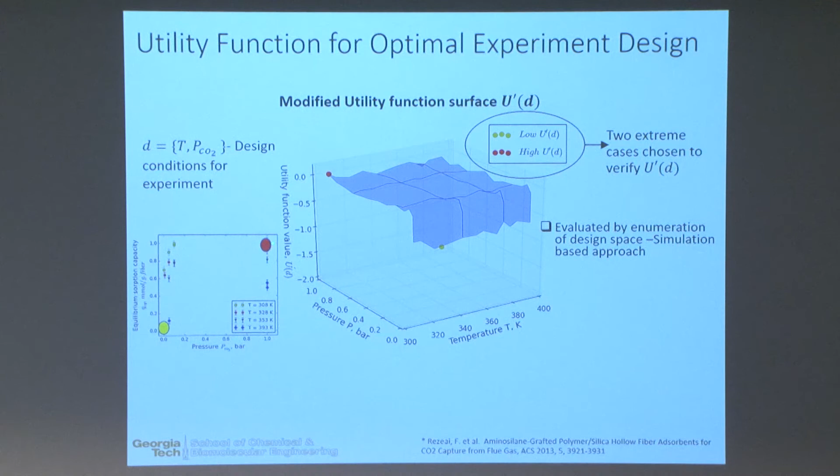So we could take the experiment at this set of conditions for pressure, or at this set of conditions—this would be the equilibrium sorption capacity measured in the experiment. We could add the experimental point here, or there. Adding those in different places, you can see we're able to tighten the distribution of our sorption capacity and improve the performance of the device, since we don't have this lower spread relative to the point where we took the experiment at the high utility value versus the low utility value. Again, we see a shift in the credible intervals upwards for the high utility versus the low utility.

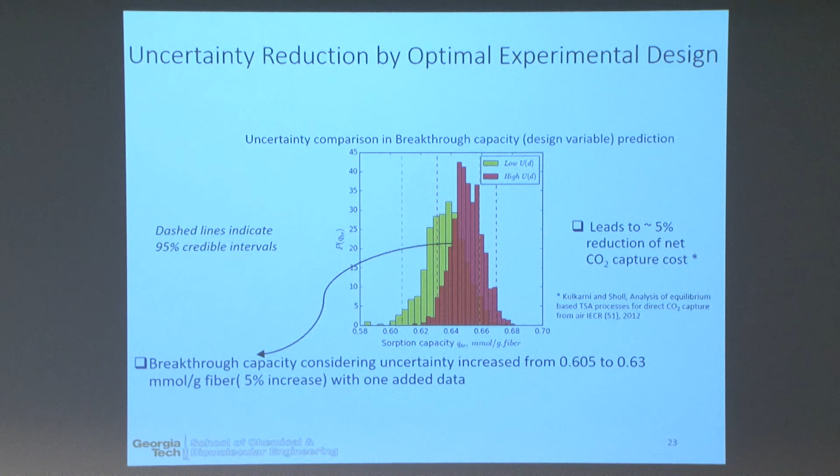All right, so that's 3 ways in which Bayesian reasoning can help us improve the performance of our process modeling and our experimental design and infusing data. Now, I wanted just quickly to end by talking about where I think this is going with respect to performance.

What we have seen, and what has been mentioned before, Jeff Linderoth made this point at FOCAPD also, is that we've seen an enormous improvement in MILP algorithms, about 2.5 billion time improvement, partly due to machine performance, but also because of algorithm performance. So we're going to see continued improvements in our traditional process systems algorithms that are going to make the types of computations I talked about with Bayesian reasoning more feasible, because it will cut down the time it takes to solve each individual model instance.

But what we're starting to see is that single core performance is not likely to improve much further, and that we're going to shift towards an increasing number of cores. Exactly the point that Larry made earlier on, understanding how we can exploit these new computational architectures is really going to be the thing that drives us forward over the next 20 to 30 years.

But in addition to being able to solve optimization and mixed integer linear programming problems, the other area we're seeing huge advances in is actually in logical reasoning and inference. Reasoning and inference algorithms are themselves also improving substantially relative to where they were 10 or 20 years ago. If you think back to the days of the 1980s when AI was in its very infancy, those algorithms are now reaching the kinds of maturity that the optimization algorithms reached maybe a decade ago. So in some sense the AI field is somewhat behind the optimization field, but...

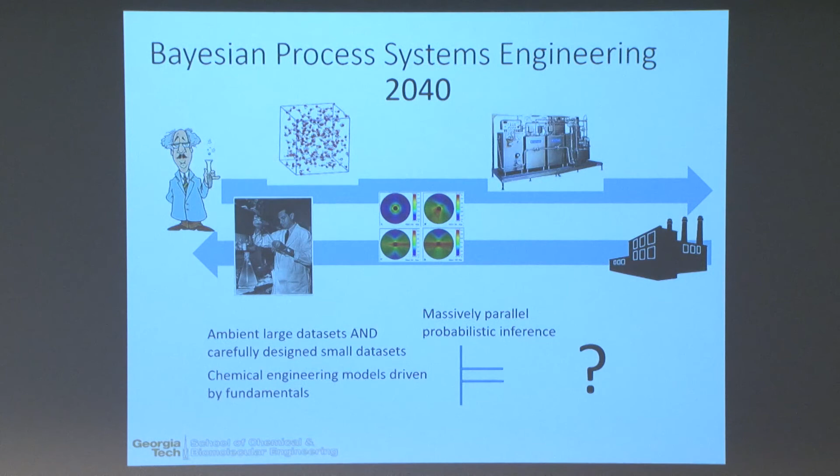So I'll return to my diagram, which is that I think we need to think about how we integrate these multiple types of information along a data supply chain, and how this will happen between now and 2040. I believe this will be done by using large data sets and carefully designed small data sets, that we mustn't lose sight of the fact that there is enormous value to small data sets, and that we will have a lot of chemical engineering models driven by fundamentals, as well as those that can be derived just by looking at the data. And that we're going to do this through massively parallel probabilistic inference.

But I cannot end without saying that one of the things that comes into the inferences that we do is the premises we make. And in the last 20 minutes, someone just changed a lot of those premises. Thank you.